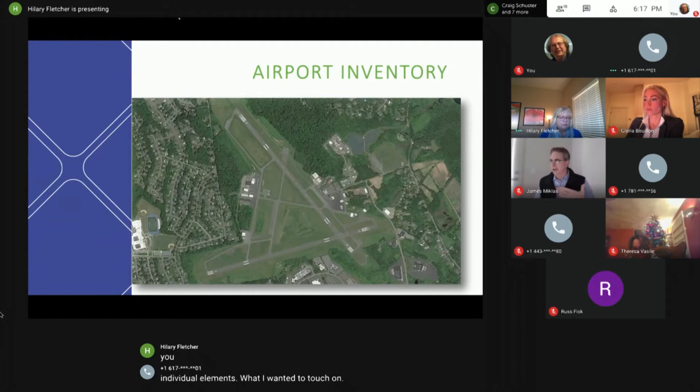What I want to touch on - as Hilary noted, we're going to have a couple of stopping points, so if you have questions, please hold onto them until we get to the next stopping point, and then I'm happy to get into as much detail as you'd like in this forum. So as I mentioned, when we start a project, we dive into airport inventory.

A little bit of history about Beverly Airport, for those who might not be familiar with it: it was originally built in 1928. It was dramatically expanded by the Navy during World War II. Frankly, as you'll see in some of the slides coming up, much of the airport still really is based on that configuration built by the Navy, 80 some odd years ago.

The role of the airport, as defined by the FAA and MassDOT, is that of a general aviation reliever, or a business class airport. It's really important to recognize that Beverly Airport is not a commercial service airport, nor will it be a traditional or commercial service airport in the future. It simply is not configured for such an operation. It is a general aviation airport.

Just to clarify what general aviation is - it's pretty much anything that's not what you'd consider a commercial airline type operation. It's your small single engine aircraft, your business jets, helicopters, police operations, things along those lines. That's general aviation - those are the aircraft operating on a daily basis at Beverly Airport.

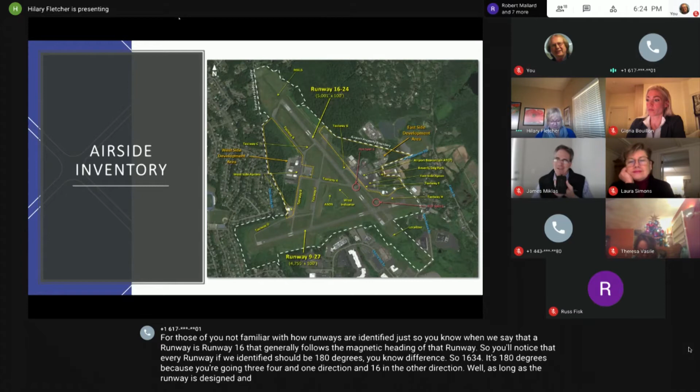Its crosswind runway runs generally east-west, which is runway 9-27, and that runway is 4,750 feet long by 100 feet wide. For those not familiar with how runways are identified, when we say a runway is runway 16, that generally follows the magnetic heading of that runway. So you'll notice every runway should be 180 degrees different - 16-34 is 180 degrees because you're going 34 in one direction and 16 in the other. As long as the runway is designed and aligned appropriately, hopefully it is 180 degrees, ideally.

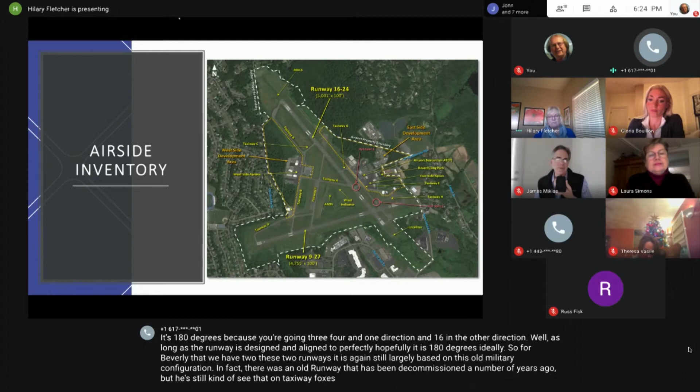For Beverly, though, we have these two runways. It's again still largely based on this old military configuration. In fact, there was an old runway that was decommissioned a number of years ago, but you can still kind of see that on Taxiway Fox as the remnants of that old runway. The taxiway system it currently has is still largely based on that old military configuration, and that's been something slowly addressed by the airport, but there's still a long way to go. That's something else we're going to be talking about a little bit later.

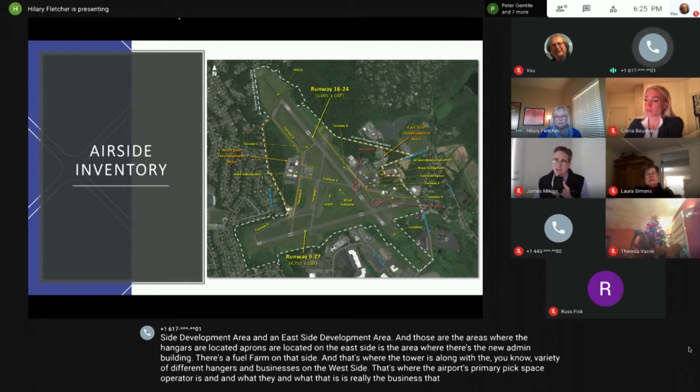The airport is fundamentally divided into two sides: a west side development area and an east side development area. Those are the areas where the hangars and aprons are located. On the east side is the new admin building, there's a fuel farm, and that's where the tower is, along with a variety of hangars and businesses. On the west side is the airport's primary fixed base operator, which is the business designed to service the larger aircraft or corporate aircraft coming in, providing fuel and other services for those operators.

But it's 470 acres. There's a lot packed into 470 acres at Beverly Airport.

I just want to note two additional points here. Highlighted in red are two hotspots, areas that the FAA has identified on the taxiways that we need to address as part of this master plan. I'll talk about that in a little bit.

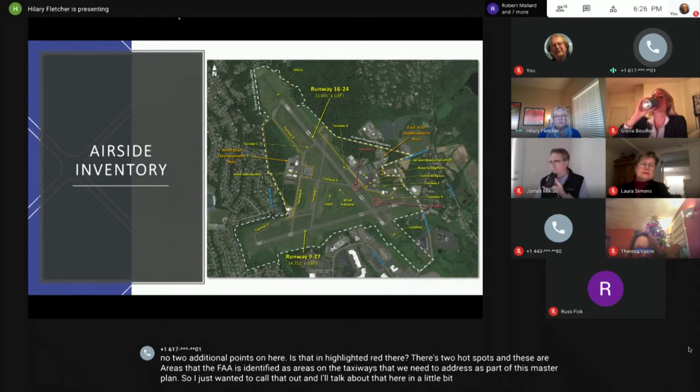Beyond the towns, there's zoning and land uses we need to be aware of - residential areas for sure, a robust roadway network around the airport, industrial parks, and environmental resources. There's a lot of wetlands around the airport, as well as Wenham Lake, so water quality is certainly an issue.

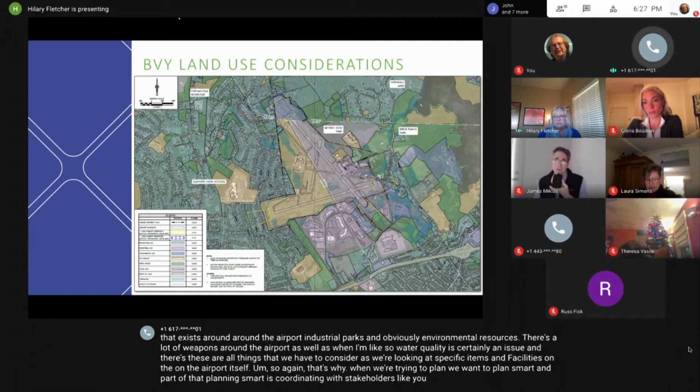These are all things we have to consider as we're looking at specific items and facilities on the airport itself. That's why when we're planning, we want to plan smart, which means coordinating with stakeholders like you and the folks on the various committees affiliated with this effort. We try to engage folks to the best of our ability to make sure we're considering all these other factors. At the end of the day, we're trying to strike a balance - providing facilities for needs at the airport while balancing it against other considerations that exist around the airport.

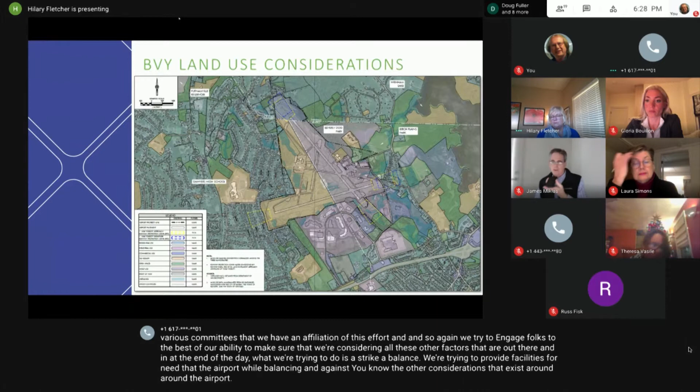Forgive me, I'm hearing some feedback on my side. Is that from me? If it is, I apologize. I'm trying to figure out if this is working okay.

Moving on - in association with balancing, it's part of our mandate on the master plan. The FAA requires us, as does MassDOT, to consider a whole range of environmental factors. There's 20-plus environmental categories we're required to look at in association with the airport's existing condition, as well as any alternatives or recommendations we come up with, including air quality, groundwater, noise, and light emissions.

One thing we wanted to mention is that we're currently undertaking a noise analysis or noise study to generate noise contours for potential noise impacts affiliated with operations at the airport. That should be completed well before our next meeting in two months.

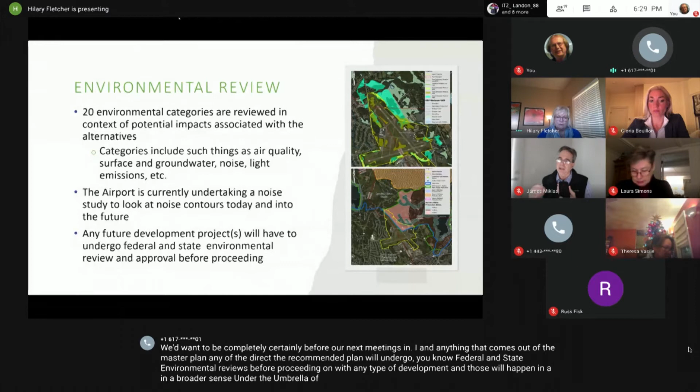Anything that comes out of the master plan, any recommended plan, will undergo federal and state environmental reviews before proceeding with any type of development. Those will happen in a broader sense under the umbrella of the master plan, but any time a project is proposed, there are associated permitting efforts that will need to be undertaken. So there will be no shortage of environmental reviews as part of any recommendations that may come out of the master plan.

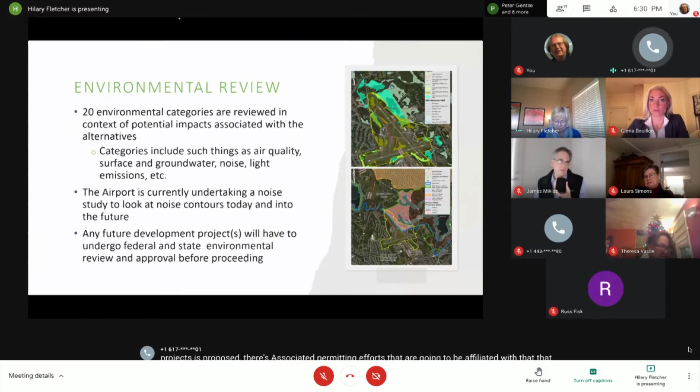So Jim, I'll talk about this briefly - I wanted to share that the airport has really embraced Gloria and her team's approach to sustainability, and it's all-encompassing: fiscal sustainability, environmental sustainability.

It's really looking at everything that they do in their decision making to make sure that it is thoughtful, it is encompassing community values, and it's really furthering a good, strong organization and future for the airport. So again, they've done some great examples of environmental work, fiscal sustainability, anything from upgrading their lighting system with LED lighting on the runway, which is a future project slated, to the energy efficient admin building and looking at opportunities to utilize facilities. So it's a great approach. We're happy to see the airport embrace that and move it forward.

And Gloria, do you have any comments you'd like to add to that effect? Yes, thank you, Hilary, for that. We, and the mayor of Beverly, have also been putting sustainability as a forefront in their priorities. And today, aircraft utilizing the airport now are more fuel efficient and less noisy than ever. As technology has changed, our own businesses have also introduced and implemented their own environmental sustainability programs. Much of our equipment is battery and solar operated, and that was given through grants through the state of Massachusetts. So we are constantly evaluating our fiscal responsibilities and land uses as well. Thank you, Hilary. Great, thanks, Gloria.

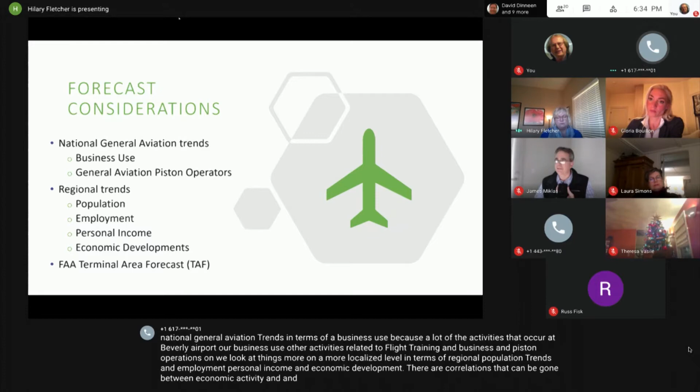We look at those as well. It's also incumbent upon us to consider how the FAA views the airport, and what they generate their own forecasts annually, and so we have to consider that as part of our efforts. And so when we go through these efforts, we go through a variety of different methodologies. I think in this case we came up with 16 or 17 different factors or methods that we worked with the airport on, and ultimately these forecasts have to be approved by the FAA.

And then we can go to the next slide here, Hilary. These forecasts we're presenting here have been reviewed and approved by the FAA, even in the context of COVID. We had actually had these approved when COVID hit. Obviously, that kind of threw a wrench into everything. But the FAA has since gone back, reviewed what we've submitted to them, and they are still in agreement with the methodology and the approaches that we've instituted as part of this effort.

So what I wanted to touch on in this slide is really there's three primary elements that we look to in a forecast. Purely from a numbers perspective, we will forecast based aircraft and aircraft operations. And currently at the airport, we've got, as I think I mentioned before, 105 based aircraft at Beverly Airport. And in 2020, we had approximately 69,000 annual operations. Based on the various methodologies and our coordination with the FAA, we have settled on an average annual growth rate of about 1.1 to 1.2% for both operations and aircraft, which basically effectively means that the number of based aircraft and operations will continue to grow.

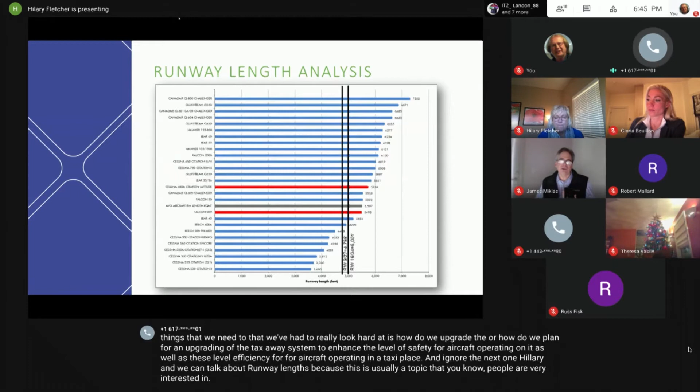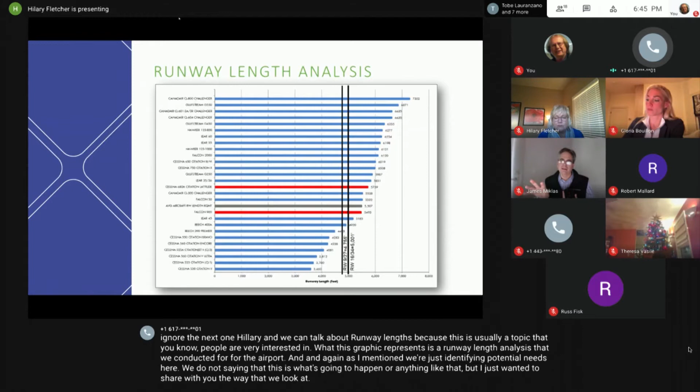What this graphic represents is a runway length analysis we conducted for the airport. Again, we're just identifying potential needs here—we're not saying this is what's going to happen, but I wanted to share how we look at runway length when it comes to facility requirements. What's reflected is a range of aircraft typically operating at Beverly Regional Airport, and these are the most demanding types.

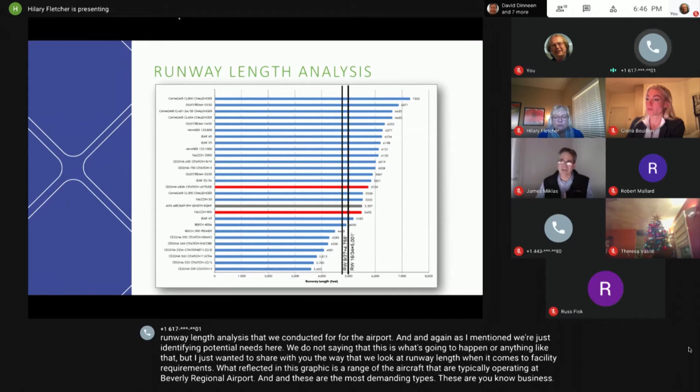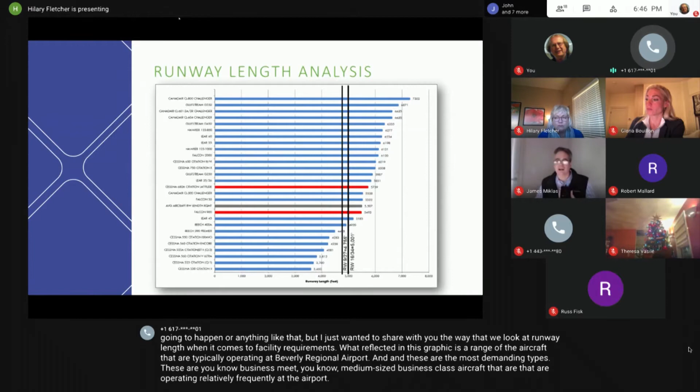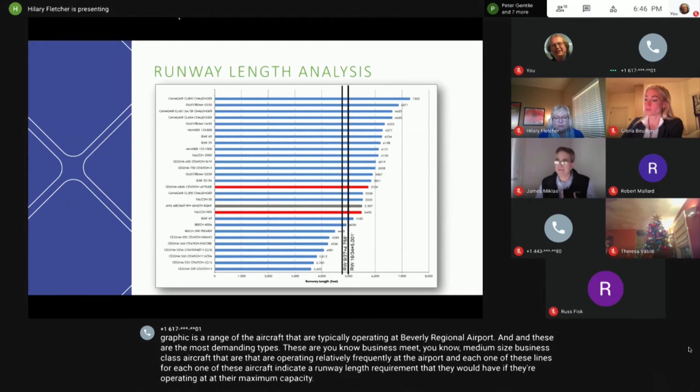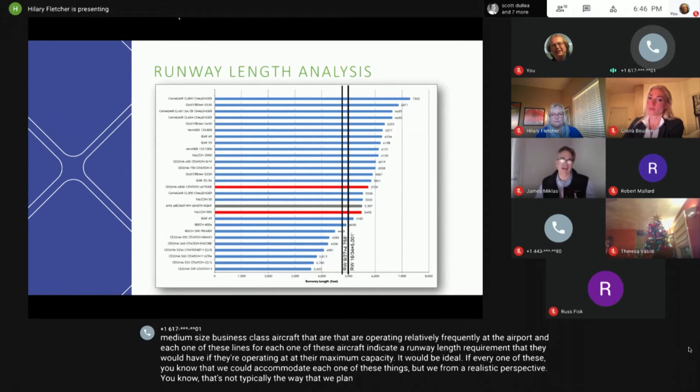These are medium-sized business class aircraft operating relatively frequently at the airport. Each of these lines indicates a runway length requirement that aircraft would have if operating at maximum capacity. It would be ideal if we could accommodate each of these, but realistically that's not typically how we plan. In planning, our goal is not to satisfy the aircraft with the longest need, but to identify a length that can reasonably address the majority of the needs of the most common users of the airport.

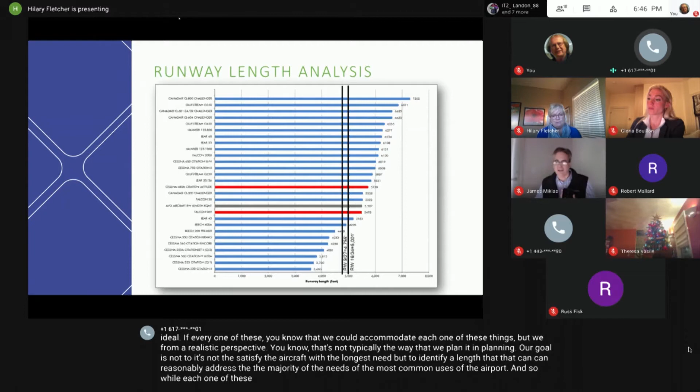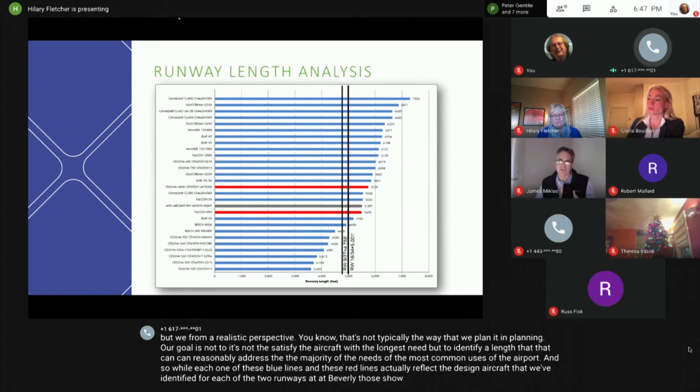So while each of these blue and red lines reflects the design aircraft identified for each of the two runways at Beverly, those show the runway length requirements for that aircraft. Vertically, we're showing the length of what we currently have at the airport. The line on the left is runway 9/27, the crosswind runway, and the line on the right is runway 16/34, the primary runway.

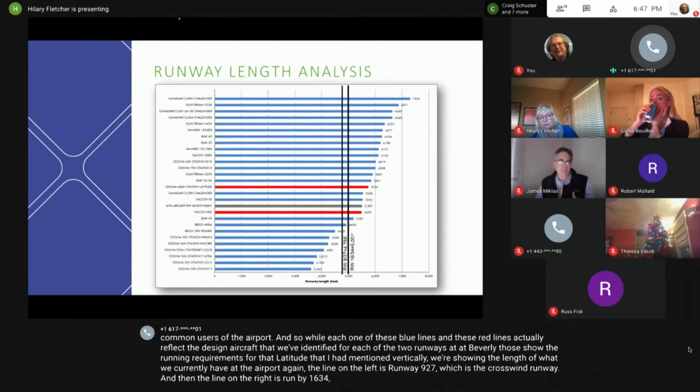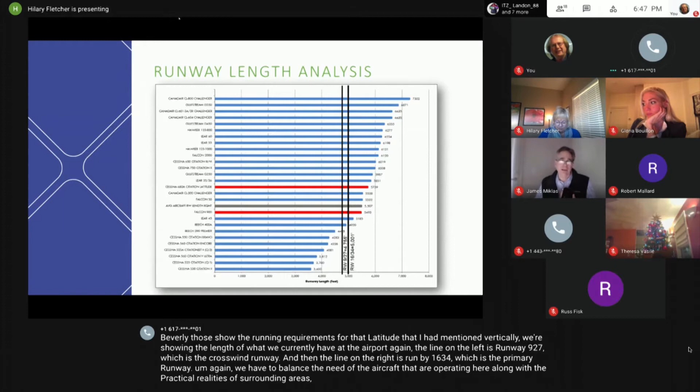Again, we have to balance the need of the aircraft that are operating here along with the practical realities of surrounding areas. But the overarching message from this graphic is that while the pilots are operating on 5,001 feet and 4,755 feet, they are currently taking penalties because of that. They would like to have more runway length, and I don't think they're shy about that. What's incumbent upon us is to figure out if there is a way to meet that need in a practicable manner that doesn't...

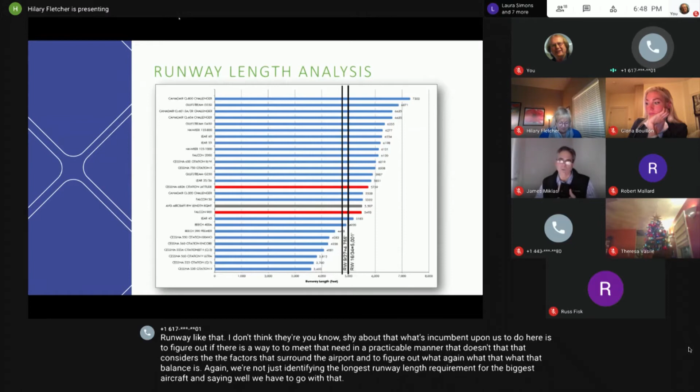Again, we're not just identifying the longest runway length requirement for the biggest aircraft and saying we have to go with that. We're trying to figure out what we might be able to achieve to help make the airport more operationally capable.

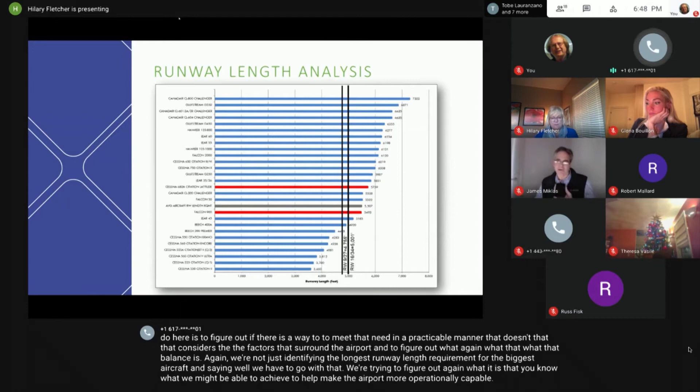And we'll talk more about that. I'm sure there'll be some questions on that too. You can go to the next slide, Hilary.

Other factors here on the airfield: we will be looking at pavement strength to make sure we have appropriate pavement out there. One thing I wanted to highlight, which goes with the sustainability component that Gloria mentioned, is that progressively the airport lighting will be transferred over to LEDs for environmental and financial considerations. Other elements we need to look at are obstructions, trees. We're in New England, and trees grow really fast around here, and they can grow up high enough that they could potentially interfere with the approach and departure paths of aircraft arriving and departing the airport. So we need to consider those factors as well.

You can go to the next slide, Hilary.

Now this next section, the alternatives analysis—again, this is all preliminary. We just had meetings yesterday with the Project Advisory Committee and the Airport Commission, and we're soliciting feedback on the results we've established at this point. So it's really important that, if you have comments, please submit them or provide us with feedback. We want to make sure this is consistent with the needs of the airport and the needs of the community.

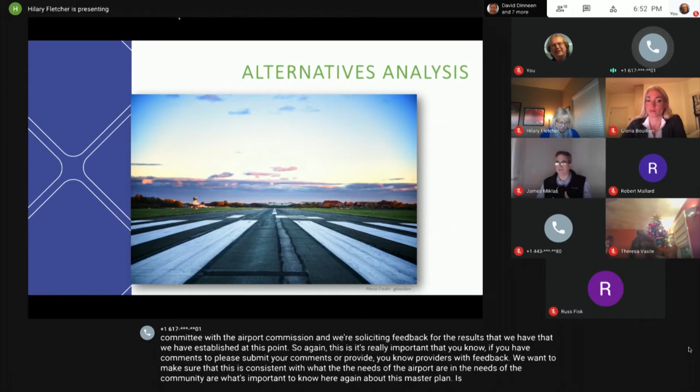What's important to note here again about this master plan is that this is your master plan, your airport, your facility. We want to make sure that it reflects the character and the needs of Beverly, of Danvers, of Wenham, and the North Shore.

So going into the alternatives, this is the process, the place where we look at how we might accommodate some of those demands. A couple things before we get into the alternatives: identifying a few goals. One is that it's incumbent upon us to meet aircraft or airport design safety standards established by the FAA and MassDOT, largely based on those design aircraft we talked about earlier.

The FAA and MassDOT are all about safety and efficiency, but mostly safety. So anything we propose has to fall under the umbrella of meeting those safety design standards established for airports, not just Beverly, but every airport in the country. We also want to support and enhance the airport's existing operational safety and efficiency, which goes hand in hand with the FAA mandate. Safety and efficiency are paramount for the airport.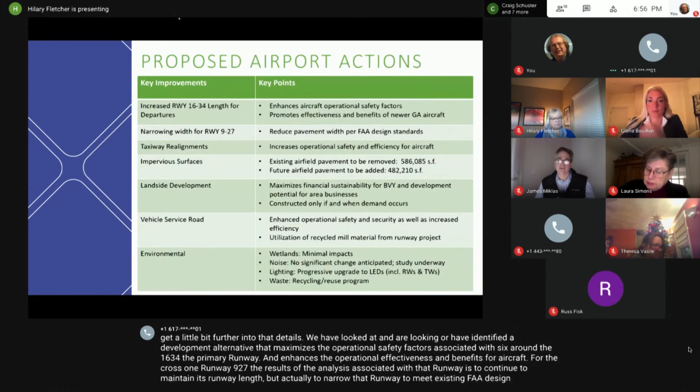In terms of the taxiways I mentioned before, oriented in a World War II configuration, we've identified a long-term plan to increase the operational safety and efficiency for aircraft operating on the airport. I've got a graphic that'll relay that.

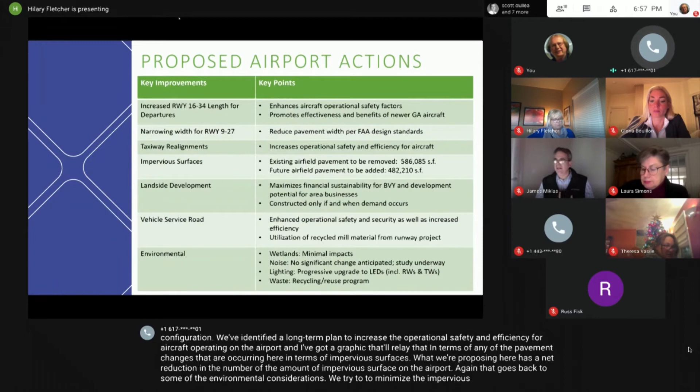In terms of pavement changes, regarding impervious surfaces, what we're proposing has a net reduction in the amount of impervious surface on the airport. That goes back to environmental considerations—we try to minimize impervious surfaces as best we can. So even with some of the changes we're proposing, because we're not only adding new pavement but also removing a lot of old pavement, we actually have a net reduction overall.

Our landside development is designed to maximize financial sustainability for the airport and the development potential for area businesses. We've identified a potential orientation for a vehicle service road, again to enhance safety, security, and efficiency for vehicles operating on and around the airport.

And from an environmental perspective, certainly some of our mandates are minimizing wetlands impacts and minimizing noise impacts. We're doing a noise study to help quantify some of that.

Minimizing light impacts, upgrading to LEDs to promote environmental sustainability as well as financial sustainability, and establishing a recycling and reuse program for the airport.

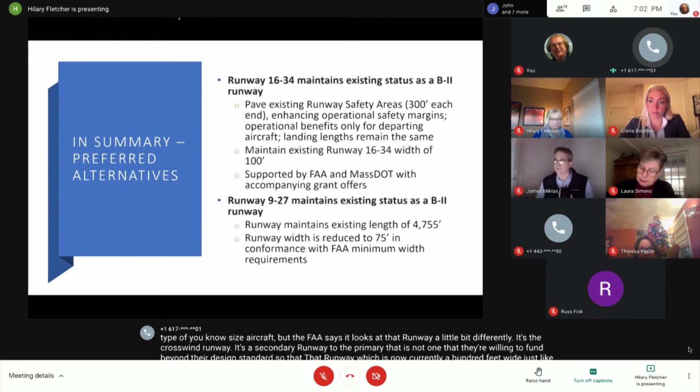Moving over to the Crosswind Runway, runway 9-27, that also is a B-II runway, a similar sized aircraft. But the FAA looks at that runway a little bit differently. It's the Crosswind Runway, a secondary runway to the primary, and that is not one they're willing to fund beyond their design standards. So that runway, which is currently 100 feet wide just like the primary runway, is actually going to get narrowed to 75 feet, and that extra 25 feet of pavement will ultimately be removed in conformance with the FAA standards.

The FAA does advocate for maintaining the existing runway length of 4,755 feet, but again, we're going to be narrowing it down. Okay, you can go to the next slide.

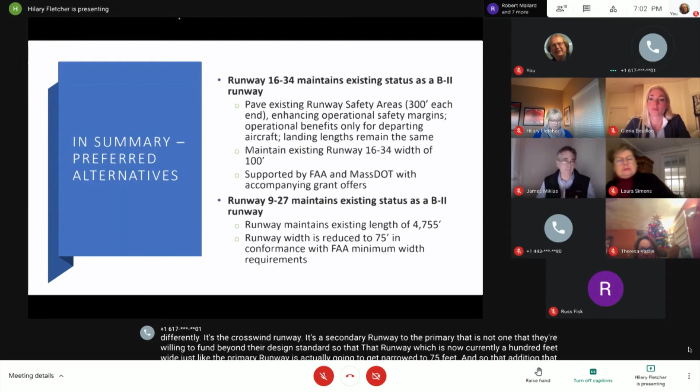This is where we start looking at some of the graphics that reflect the alternatives we're presenting today. We actually had probably 20 alternatives, some of which are kind of crazy, but these are the ones we settled on. They're the most reasonable ones for us to consider.

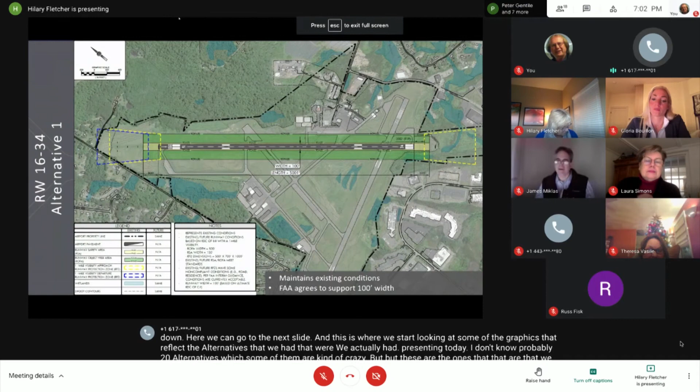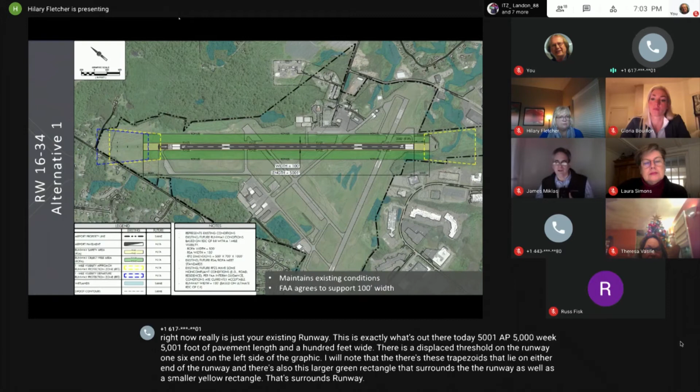Alternative one, on the screen right now, really is just your existing runway. This is exactly what's out there today: 5,001 feet of pavement length and 100 feet wide. There's a displaced threshold on the runway 16 end, on the left side of the graphic. I'll note there are trapezoids on either end of the runway, plus a larger green rectangle surrounding the runway and a smaller yellow rectangle surrounding the runway. These are all FAA regulatory safety standards established with various requirements to help maintain safety on the runway for any aircraft operating here.

So when the FAA looks at a runway, they look at not only the paved sections, but also the runway safety areas, the object-free areas, the runway protection zones. In fact, there's a whole raft of other safety criteria that exist around a runway that we're not even showing here, but for our purposes today we wanted to focus on these three critical ones. Right now the runway is generally compliant with these safety criteria, and we're not proposing that we change any of that.

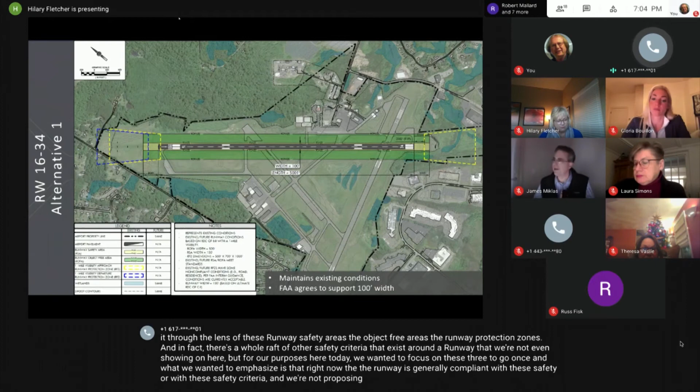The only change we're proposing here, and you can go to the next alternative, which is alternative 2, which is really the alternative being recommended as the preferred alternative, is that we are proposing paving 300 feet in that yellow area on either end of the existing runway.

The size of that yellow area, that runway safety area, hasn't changed. The size of the object-free area hasn't changed, nor the runway protection zones. In fact, the thresholds haven't changed. The numbers are exactly where they are today is where they're going to be in the future.

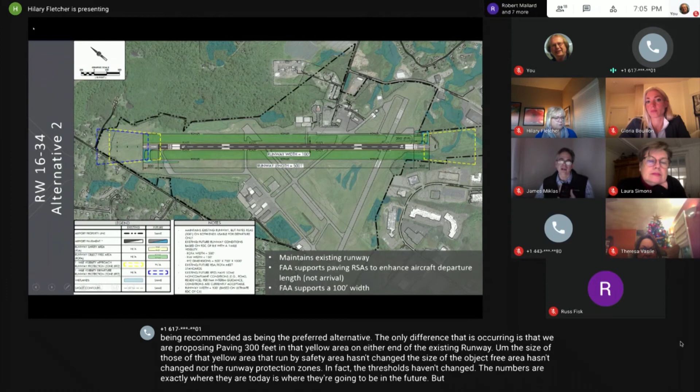But what this alternative does is that if an aircraft were to overrun the end of the runway, instead of trying to stop in grass, which oftentimes will cause damage to an aircraft or create greater issues, it'll be paved. It'll be able to sustain the weight of an aircraft. The ancillary benefit for the operators is that while they can't land on that extra bit of pavement, they will be able to take off from it, netting them a little extra room for departing.

So going back to that graphic where we showed all the various runway length requirements for those different aircraft, adding 300 feet is going to help them a little bit. It's not going to meet all of the requirements potentially reflected in that graphic. It's going to be an incremental benefit to them, but not a dramatic benefit. But they would appreciate any improvements that we could possibly afford them.

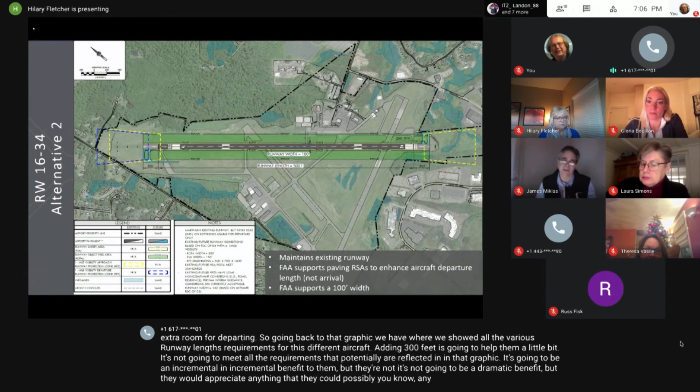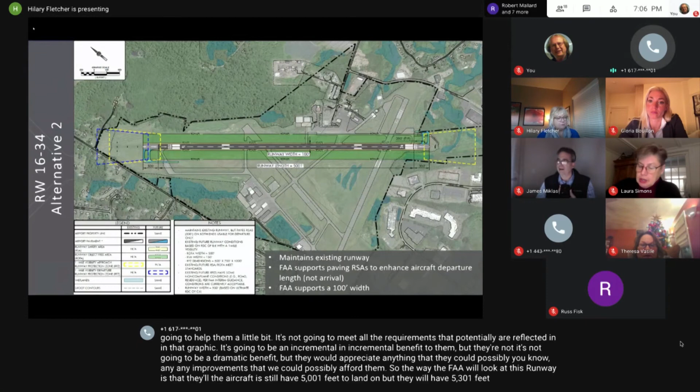So the way the FAA will look at this runway is that the aircraft will still have 5,001 feet to land on, but they will have 5,301 feet to take off on in either direction in this alternative. And again, we're maintaining the 100-foot width on this.

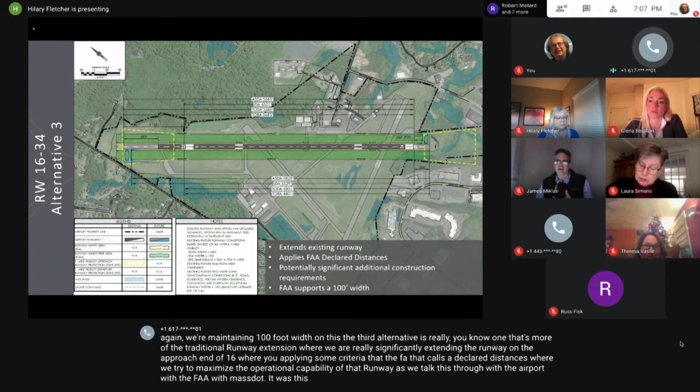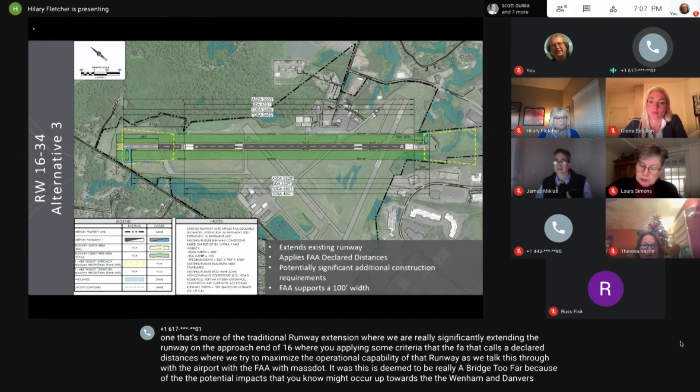The third alternative is really more of the traditional runway extension, where we are significantly extending the runway on the approach end of 16. We're applying some criteria that the FAA calls declared distances, where we try to maximize the operational capability of that runway. As we talked this through with the airport, the FAA, and MassDOT, this was deemed to be really a bridge too far because of the potential impacts that might occur up towards the Wenham and Danvers line on the 16 end, and for the benefits that would be achieved, the investment just didn't seem to make sense.

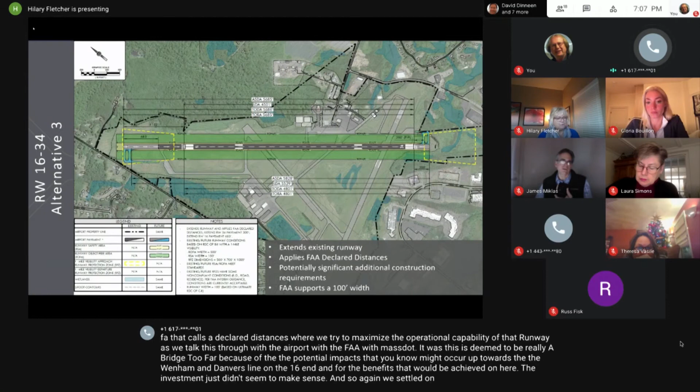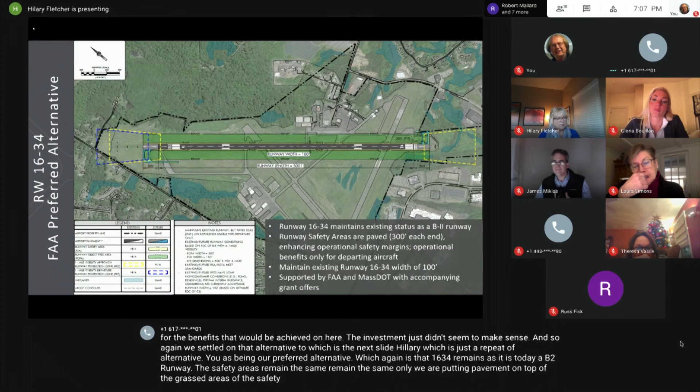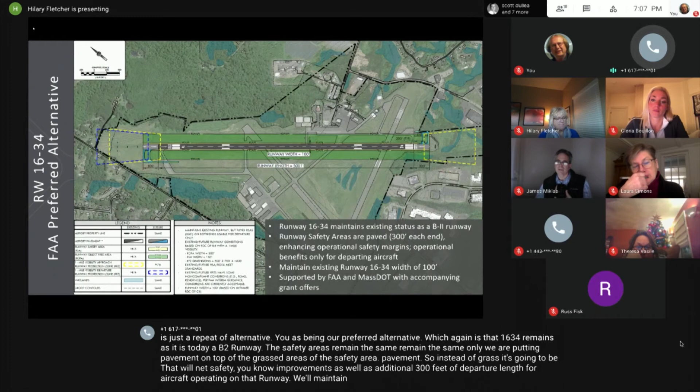So, again, we settled on alternative 2 as being our preferred alternative, which again is that runway 16/34 remains as it is today, a B2 runway. The safety areas remain the same, only we are putting pavement on top of the grassed areas of the safety area. So instead of grass, it's going to be pavement. That will net safety improvements, as well as an additional 300 feet of departure length for aircraft operating on that runway. We'll maintain the 100 feet of runway width. And again, this is something that's supported not only in spirit, but also financially by the FAA.

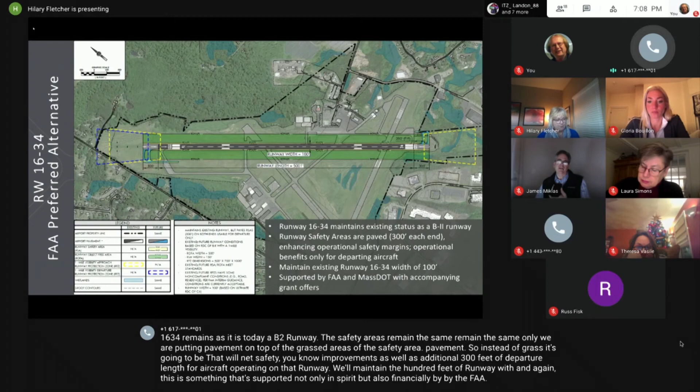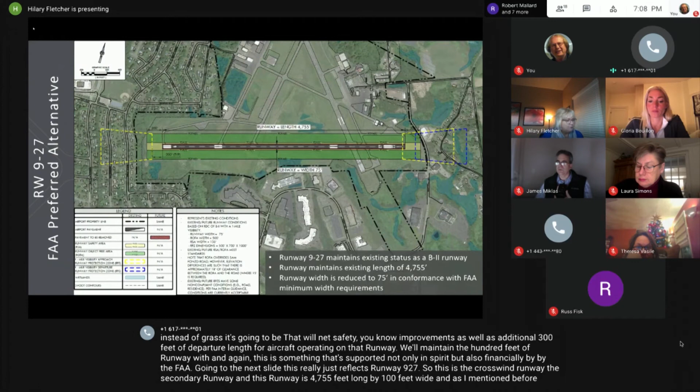Going to the next slide, this really just reflects runway 9/27, the crosswind runway, the secondary runway. This runway is 4,755 feet long by 100 feet wide, and as I mentioned before, it too is a B2 runway, but this is not one that the FAA or MassDOT is willing to extend to maintain a runway width beyond the current standard. So in this case, while the thresholds will remain exactly as they are and the pavement ends will remain exactly as they are, the runway ultimately will be narrowed down to 75 feet in conformance with FAA design criteria.

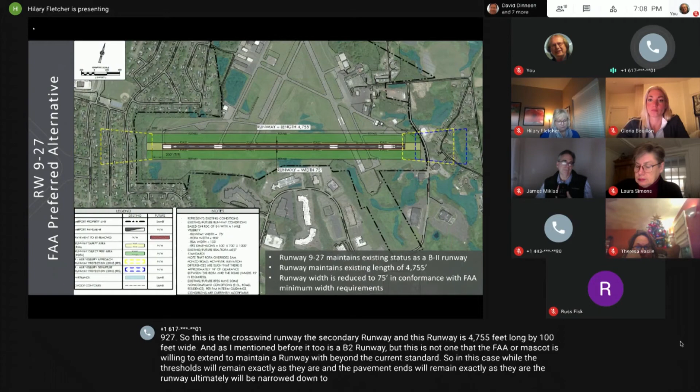You can go to the next slide. This slide has a lot of information on it, and I'll try to walk through this as best I can.

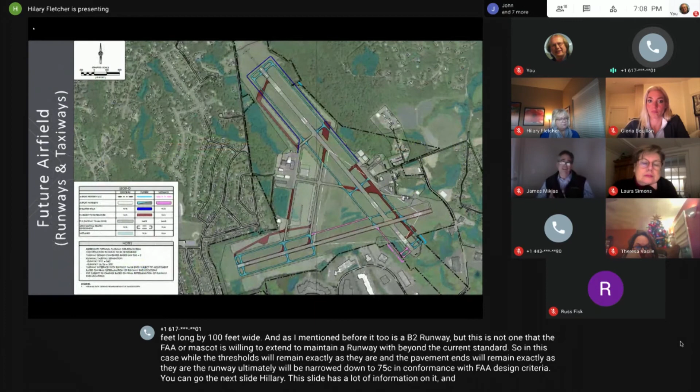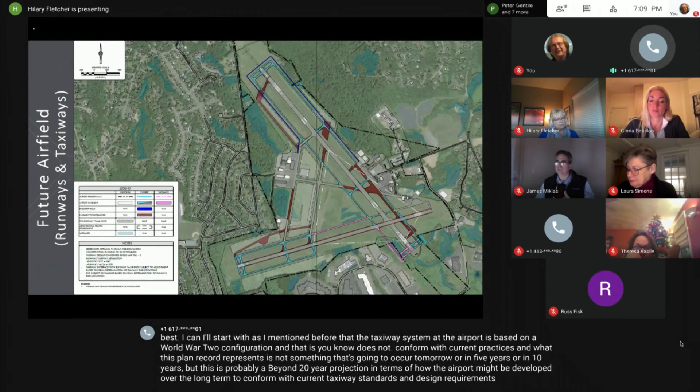I'll start with, as I mentioned before, that the taxiway system at the airport is based on a World War II configuration and does not conform with current practices. This plan isn't something that's going to occur tomorrow, in 5 years, or even 10 years, but is probably a beyond 20-year projection for how the airport might be developed over the long term to conform with current taxiway standards and design requirements, operating in a better, more efficient, and safer manner than today. That's not to say the airport doesn't operate safely today, but there's always room for improvement.

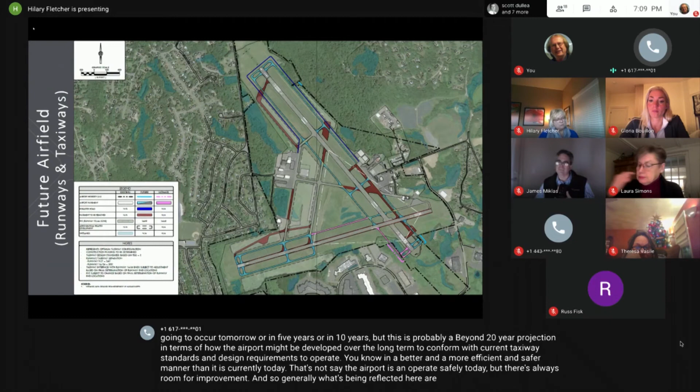Generally, what's being reflected here in blue are parallel taxiways that may be constructed over a period of time bordering either side of runway 16-34 and potentially parts of runway 9-27. If those taxiways were constructed, we're also showing some red areas — these are the old taxiways, old pavements that would be made redundant by the new taxiways, and would ultimately be removed because they're not needed.

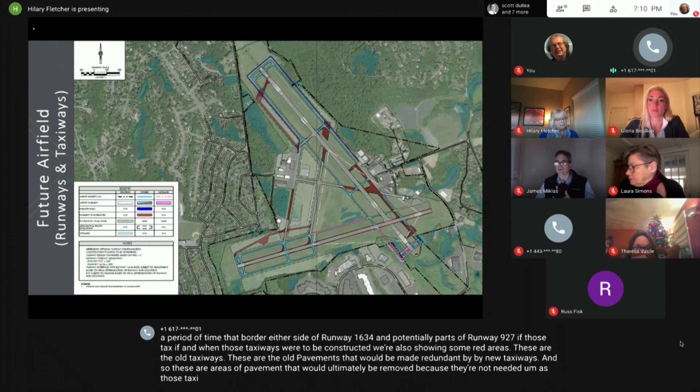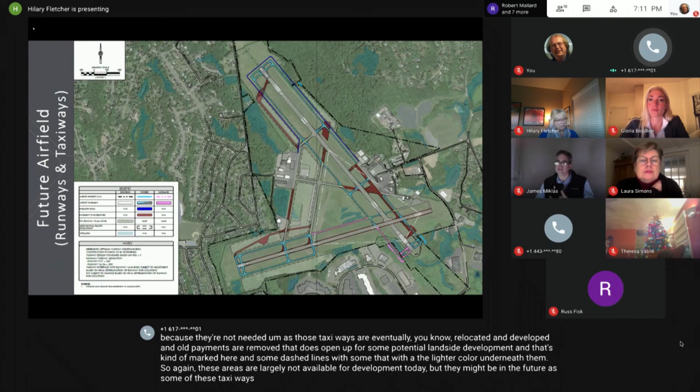As those taxiways are eventually relocated and developed and old pavements are removed, that opens up potential landside development, marked here in dashed lines with a lighter color underneath. These areas are largely not available for development today, but they might be in the future as some of these taxiways are moved and developed over an extended period of time.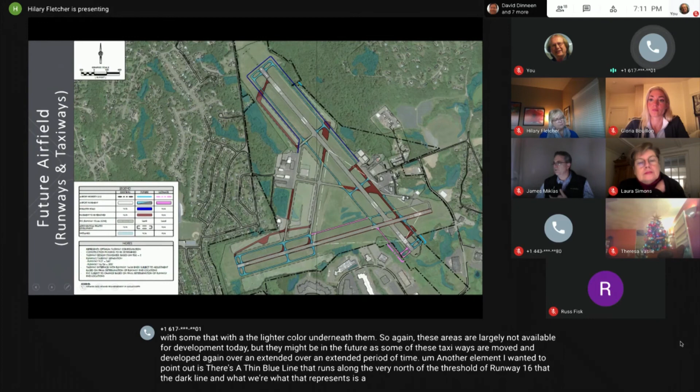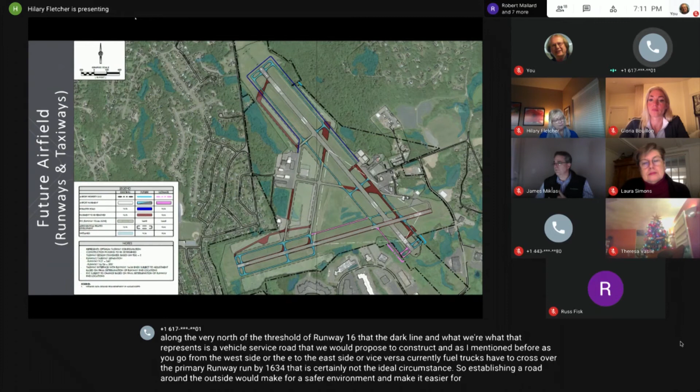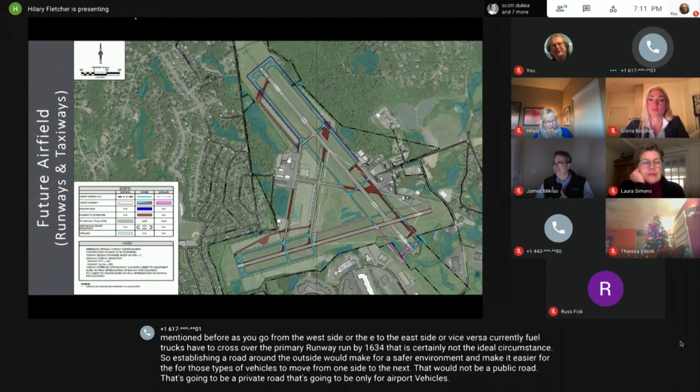Another element I wanted to point out is a thin dark blue line running along the very north of the threshold of runway 16. That represents a vehicle service road that we would propose to construct. Currently, as you go from the west side to the east side or vice versa, fuel trucks have to cross over the primary runway 1634, which is certainly not ideal. Establishing a road around the outside would make for a safer environment and make it easier for those types of vehicles to move from one side to the next. That would not be a public road — it would be a private road only for airport vehicles. We're not going to be able to do a cut-through from Beverly to Danvers by way of the airport road, so I just wanted to be clear about that.

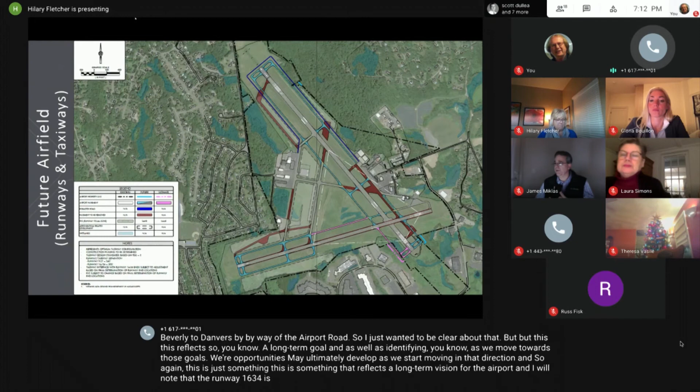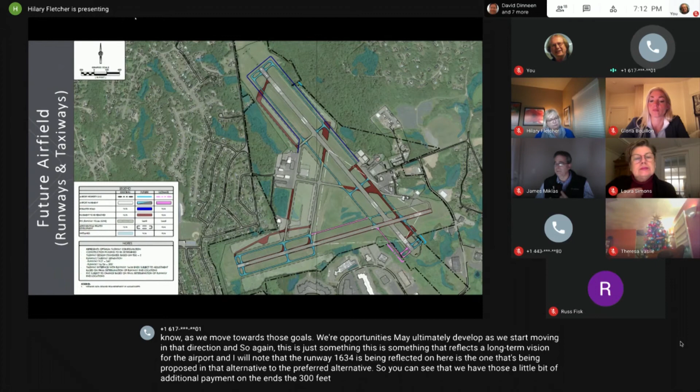This reflects a long-term goal, as well as identifying, as we move towards those goals, where opportunities may ultimately develop as we start moving in that direction. Again, this reflects a long-term vision for the airport. I'll note that the runway 1634 being reflected here is the one proposed in alternative 2, the preferred alternative. You can see there's a bit of additional pavement on the ends, 300 feet, and the taxiways meet up in that area. Again, this is not a foregone conclusion — it's just a preliminary plan.

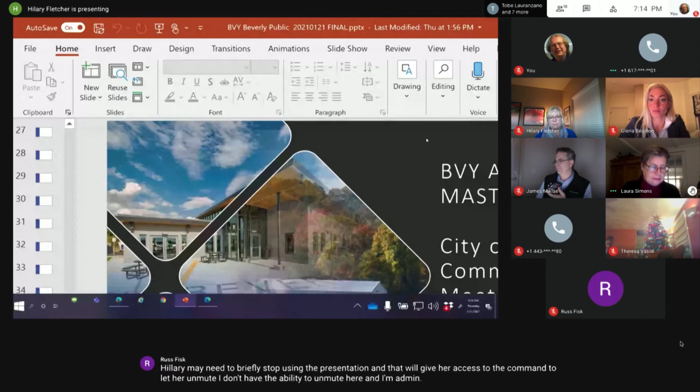You can raise a hand. Laura — we have to unmute Laura. Hang on, I'm not hearing Laura. I don't hear her either. I'm sorry, Laura. Technology is wonderful, isn't it? Laura, if you want, you can call in as well. Can we unmute Hilary? I don't think I have the ability to. I'm trying to, I'm actually having difficulty doing that. Hilary may need to briefly stop using the presentation, and that will give her access to the command to let her unmute. I don't have the ability to unmute here, and I'm admin. Okay, well, we're navigating our technical issues. I think Laura's dialing in. But any other questions? I don't see any other hands raised yet.

Sure, there must be some questions.

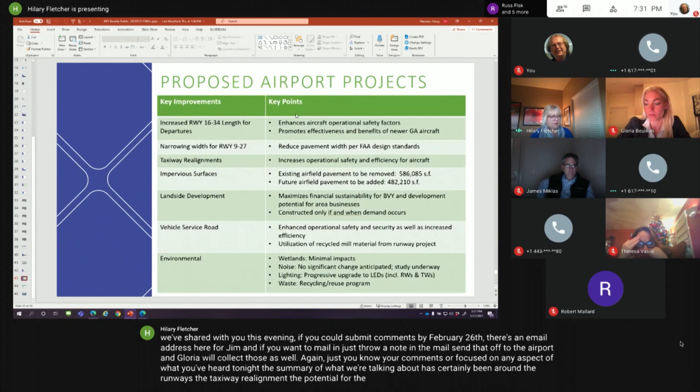Again, your comments are focused on any aspect of what you've heard tonight. The summary of what we're talking about has certainly been around the runways, the taxiway realignment, the potential for the VSR, and making sure that we're meeting the needs of the airport and balancing it with the community. So please give thought to that. We really would like to get your input and any other thoughts that you may have.

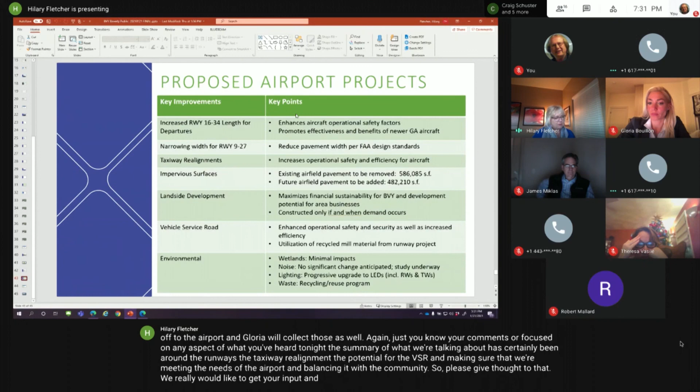So again, just before we wrap up, are there any questions, anything else that you haven't had a chance to ask that you'd like to share with us at this time? Okay.